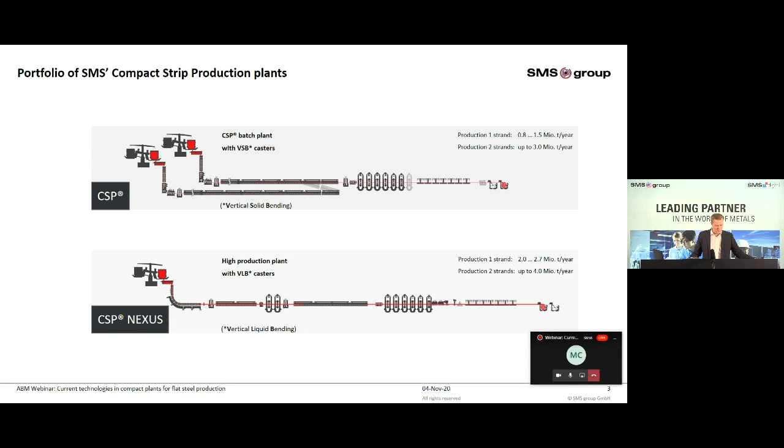With the first CSP plant in 1989, SMS has now more than 30 years of experience in thin slab casting and direct rolling technology. As you can see in the sketch, a typical CSP plant has one or two casting machines, a pendulum shear to cut the strand into slabs, a tunnel furnace to heat and homogenize the slab, acting as a buffer for the compact hot rolling mill. The mill typically has 6 to 7 rolling stands, followed by a laminar cooling table to cool down the strip and adjust the material properties of the product. At the end, the strip is coiled at the downcoilers.

The standard production mode is batch, coil-to-coil production, meaning the slabs are cut after the casting machine to coil weight. With the help of a high-speed shear, a CSP plant can produce in semi-endless mode. A very long slab is produced, rolled, and cut into multiple coils right before the coiler. This mode increases the production stability when rolling thin strips.

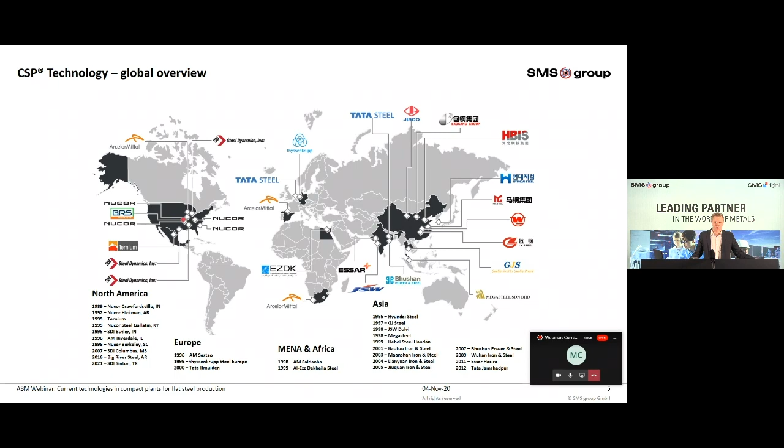Big River Steel is a newcomer in the steel business. The Greenfield project was realized due to several financially strong investors. The steelworks of Big River Steel is arranged, and the installed technology was chosen with the focus on flexible production and efficient operation.

As said, Big River Steel will produce 3 million metric tons per year after commissioning of the second phase, with only 600 employees in total. The hot strip thickness range is 1.5 millimeter up to 25.4 millimeter, and Big River is able to produce strips up to 1930 millimeter width.

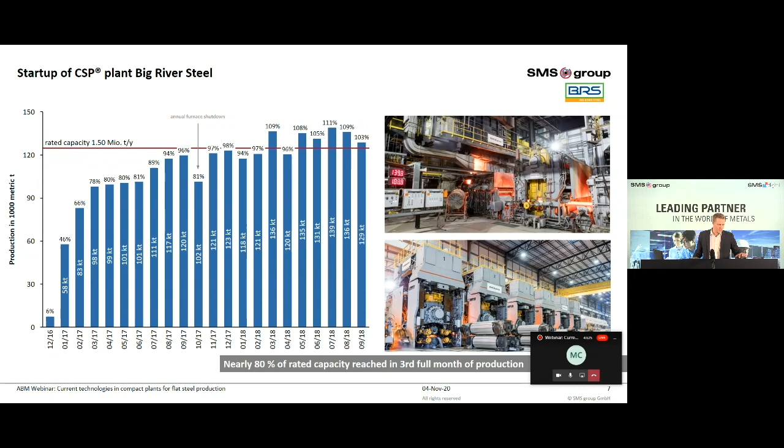The digital future has already begun. Big River Steel is called the Learning Steel Factory. SMS Digital, a subsidiary of SMS Group, is a team of data scientists and digitalization experts with roots in the SMS Group. The combination with SMS Digital's innovative solutions for data infrastructure, digital products, and machine learning resulted in the first learning and self-optimizing steel mill.

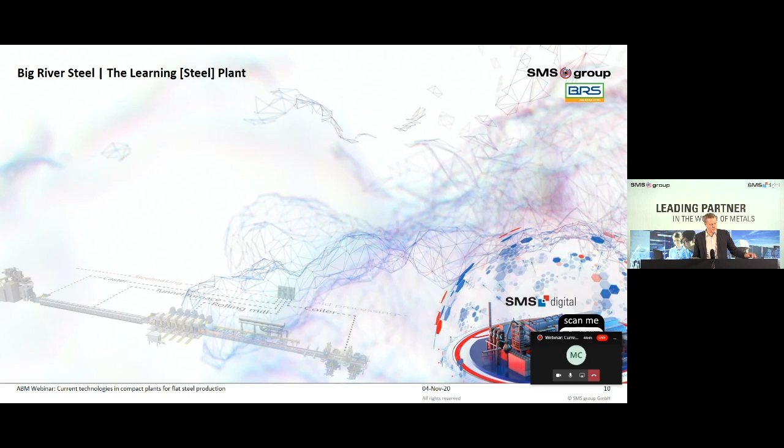2,700 sensors and 15,000 signals are continuously and permanently stored in the SMS data factory. The huge volumes of data are evaluated and used as part of a big data system to improve melting, casting, and rolling strategies.

The learning steel plant auto-adaptively optimizes its production process as part of an integrated value chain based on physical plant elements, data-driven models, and systems with regards to production planning, product quality, and plant condition. The key factor of success is turning data into value.

For more information about the Learning Steel Factory of Big River Steel, you can scan the QR code.

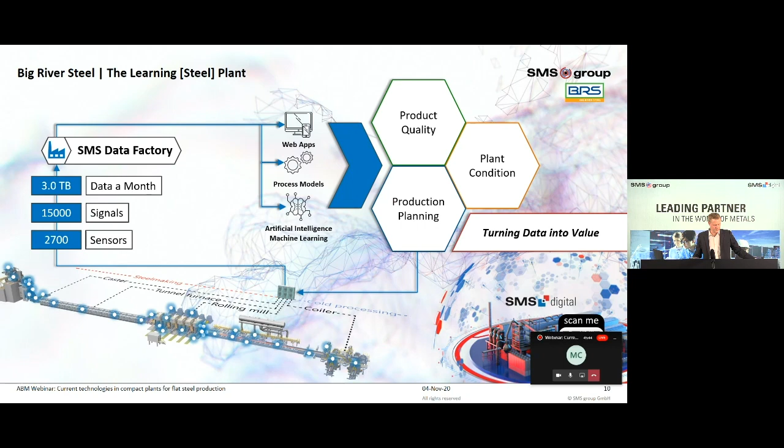From the very beginning in this project, SMS and Big River Steel focused on efficiency, minimized energy consumption, as well as minimized emissions. SMS designed and built the whole plant with the selection of components and technologies to achieve these green requirements. That's why Big River Steel received the LEED certificate for leadership in energy and environmental design, as the first steel plant worldwide.

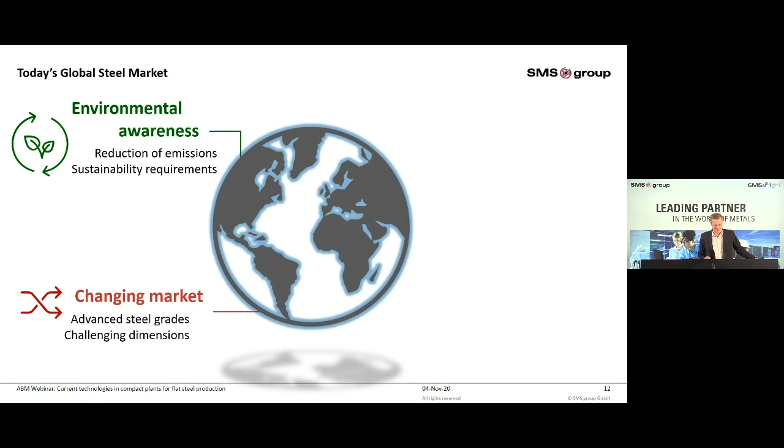Having a look at today's global steel market, the green pressure for environmental awareness is growing. The steel industry has to reduce their emissions and fulfill sustainability requirements in the future. In addition to that, the changing market asks for even more advanced steel grades and challenging dimensions. Combined with the global overcapacities of over 20%, today's market demands are efficiency, flexibility, and promptness to produce steel on a profitable level.

The solution which meets these market demands is CSP Nexus. The layout shows the basic Nexus setup with a casting machine, a tunnel furnace, a two-stand roughing mill, a second furnace, a 6-stand finishing mill, laminar cooling, and 2 downcoilers.

The Nexus plant is capable of producing up to 2.7 million tons per year with 1 strand, and up to 4 million tons per year with 2 strands.

As a 1-strand plant, furnace number 1 has a length of 30 meters, and furnace number 2 has a length of 80 meters. It is possible to produce strips with a thickness of 0.8 millimeters up to 25.4 millimeters, and a width of up to 2,130 millimeters. The Nexus plant can produce in batch, short endless, and endless rolling mode.

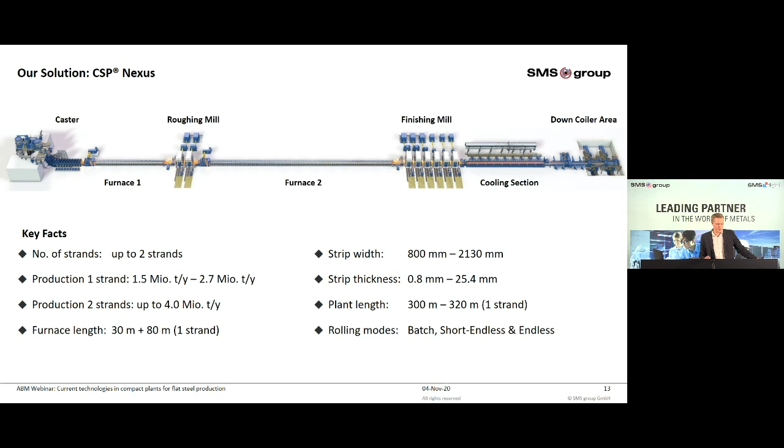Having a look at the product mix portfolio, the CSP plant can produce all typical steel grades, including silicon, multi-phase, advanced high-strength steel for the automotive industry. As you might know, peritectic grades are difficult to produce with a thin slab caster. The combination of high casting speeds and a funnel-shaped mold is not favorable due to phase transformation and the related volume change during solidification of peritectic grades.

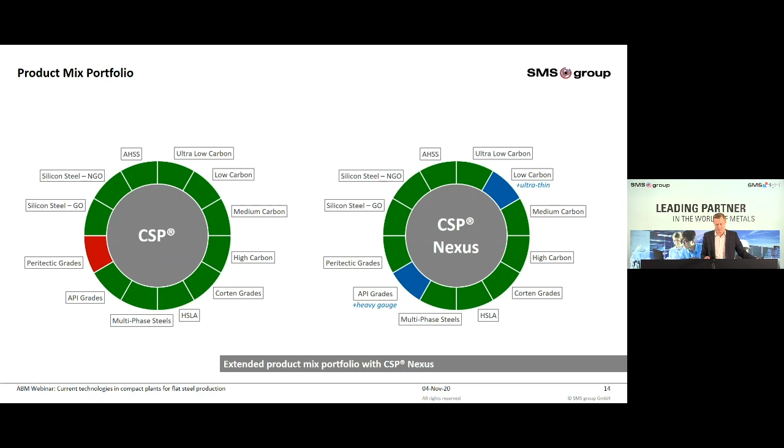The Nexus plant is capable of producing such peritectic grades. In addition to that, it can produce ultra-thin, low-carbon grades, as well as heavy-gauge API grades up to 1 inch.

Now, I would like to fly with you through the Nexus plant, beginning with a high throughput casting machine. The bow-type caster has a length of up to 25 meters, a casting thickness range from 110 to 130 millimeters, a casting speed of more than 6 meters per minute, and a casting width of 2,130 millimeters, which ends up in a high level of steel mass flow.

To ensure a stable production at high steel mass flows, it is mandatory to control the steel mass flow in the mold.

The stabilization of the mold level starts with the machine head design. Therefore, the mold, the oscillator, segment 1, segment 2, and the electromagnetic brake are positioned on the foundation independently to prevent vibrations. To control the steel flow, the selection and interaction of the SEN, the established funnel-shaped mold design, and the electromagnetic brake is very important.

In the design phase, several CFD simulations were done at SMS. The figure at the bottom shows the result of a simulation with and without the EMBR at a high steel mass flow. The crucial factor is the steel velocity at the mold level. A too high velocity will end up in unstable casting conditions due to uneven melting of the casting powder and an inhomogeneous heat transfer in the mold.

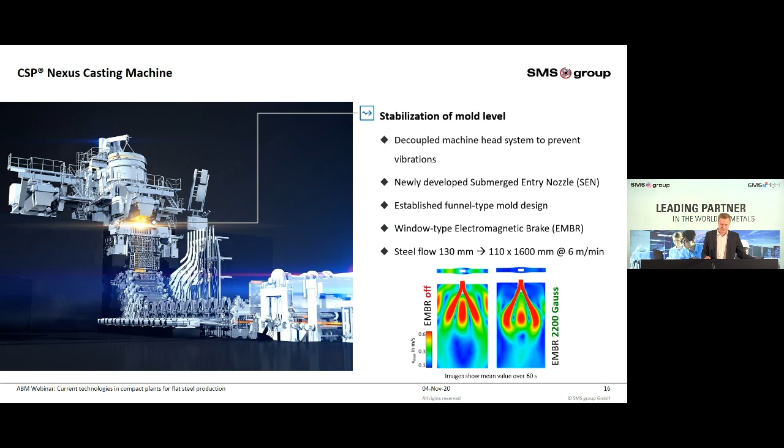At high casting speeds, the strand shell is thin when leaving the mold. To minimize the bulging effect of the strand shell between the rollers, several countermeasures are necessary. The secondary cooling is controlled by a level 2 process model to guarantee a fast strand shell growth without quality issues. The bearing windows between the rollers are small and staggered to minimize strain.

The next slide shows an option to even extend the product range. For some high crack sensitive steel grades, it is required to cast at low casting speeds. Therefore, the machine head can be changed to use a parallel mold for 150 millimeter casting thickness to realize casting speeds below 2 meters per minute. This option enables the Nexus plant to produce steel grades with a carbon content in the peritectic region.

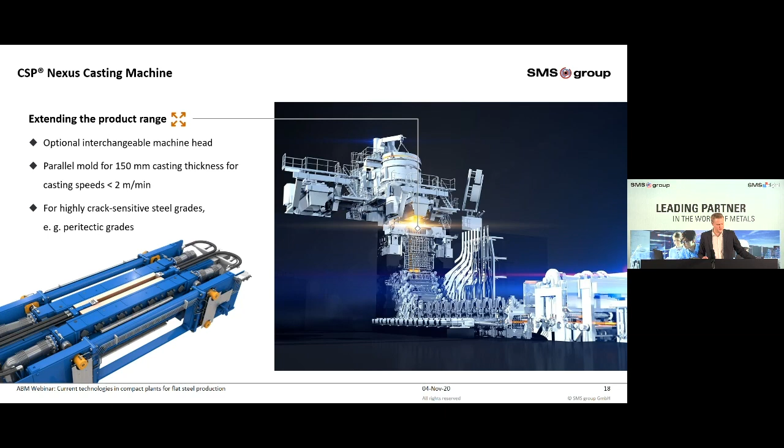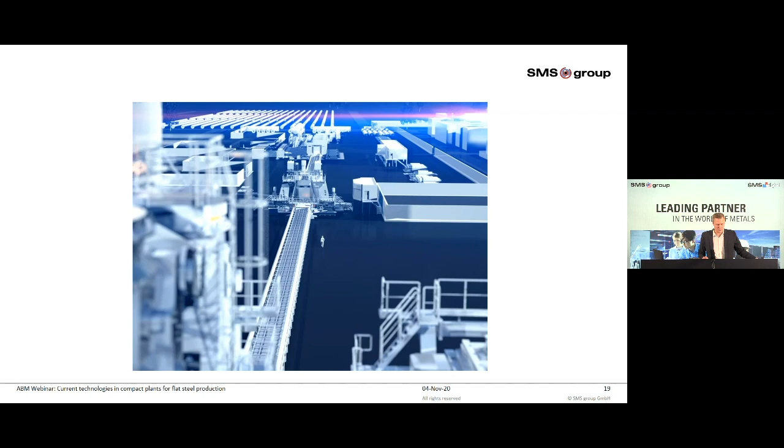Having a look from the caster platform, you can see the first tunnel furnace, the roughing mill, and the second tunnel furnace.

The task of tunnel furnace number 1 is to increase the slab temperature, to equalize the slab temperature for a risk-free production of crack-sensitive grades, to enable the batch process so the slab is cut before beginning the rolling process in the roughing mill, and to enable the work roll change in the finishing mill.

The tasks of tunnel furnace number 2 are to enable the independent operation of roughing mill and finishing mill, to homogenize the temperature of the transfer bar, to raise the temperature of the transfer bar in case of endless production, and to enable the work roll change in the finishing mill without stopping the production sequence.

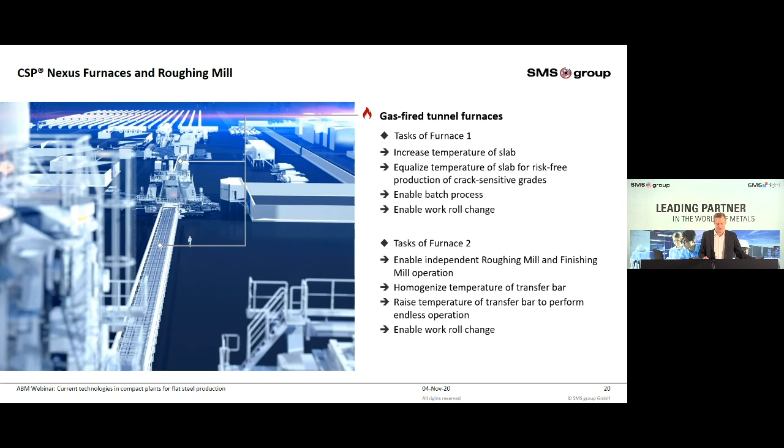The furnaces are designed for minimum energy consumption and emissions. Ultra-low NOx burners are used in the pulsing mode to always run in the most efficient working range. These burners are hydrogen ready and can be operated with gas, a hydrogen mixture, or even 100% hydrogen. The heat of the waste gas is used to preheat the fresh air by recuperators.

Dry rollers with energy savings of up to 85% can be installed in tunnel furnace number 2 because of the lower atmosphere temperature level compared to furnace number 1. Tunnel furnace number 1 can be equipped with fiber insulated rollers with energy savings of up to 30% compared to concrete rollers.

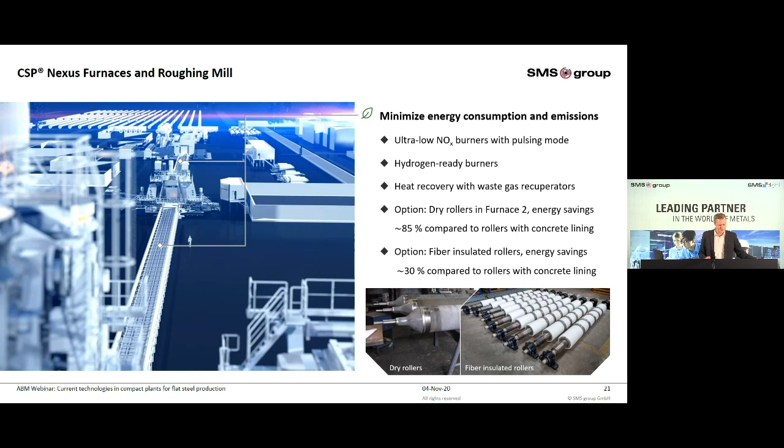The roughing mill of the Nexus plant is capable of reducing the slab thickness to an optimum incoming thickness for the finishing mill. It allows the caster to always cast at optimum casting thickness in terms of productivity and temperature. Productivity can be increased even more by the use of an edger in front of the roughing mill.

The next slide shows the finishing mill with typically 6 mill stands. The advanced guiding system improves the center line positioning and increases rolling stability, especially during thin gauge production. Stable rolling of thin and wide high strength steel grades is supported by a highly dynamic thickness control. The strip temperature is controlled during the rolling process to hit the desired final rolling temperature. An integrated temperature model considers and controls the temperature profile along the entire plant. The well-established CVC Plus system cares for excellent strip profile, contour, and flatness.

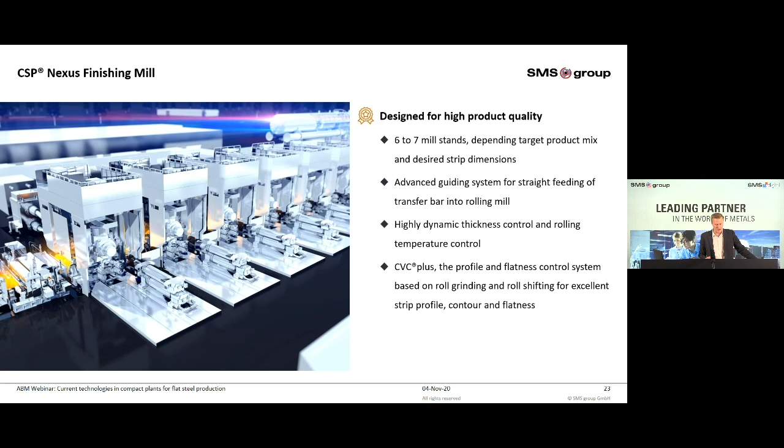An outstanding strip surface quality is guaranteed by rolling gap lubrication, gap conditioning, including anti-peeling and roll gap lubrication. The scale growth is considered along the entire plant. The tunnel furnace atmosphere is adjusted to a favorable level of scale formation. State-of-the-art high-pressure descaling systems are positioned in front of both mill trains.

Alternatively, the Piroscale system can be installed, which is a newly developed rotary descaling system. It reduces the water consumption by 50%, which reduces the temperature losses. The rotary system design leads to a more uniform descaling result.

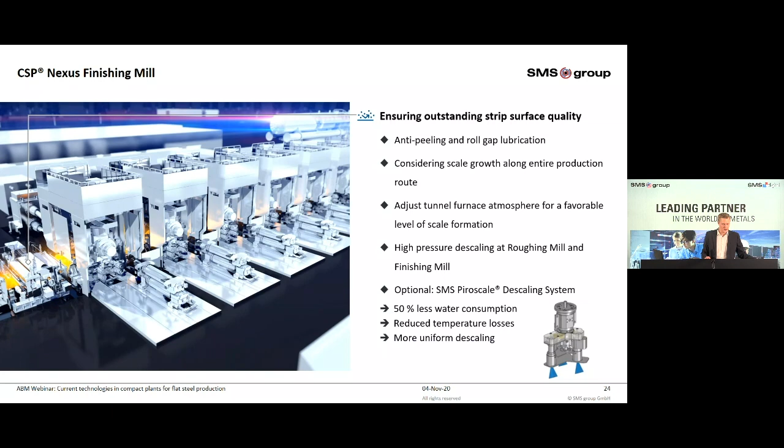Another new development is the convectional roll cooling. As you can see in the left graphic, the work rolls are usually cooled by spray nozzles. The right graphic shows the principle of cooling using the effect of forced convection. With this system, up to 90% energy costs can be saved due to less water consumption and less pump power needed. The picture shows an installation of the convectional roll cooling at a German customer. The system is robust, wear resistant, and self-adjusting, so this system became a standard feature in all future SMS mills.

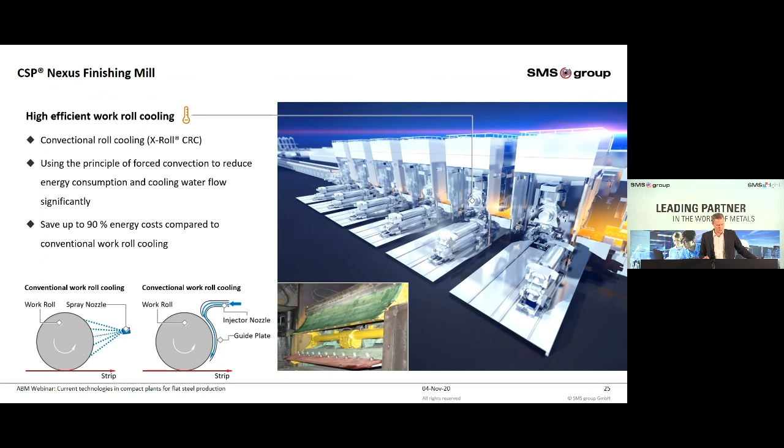The next slide shows the laminar cooling line of the Nexus plant. The latest strip cooling technology is installed and allows a wide range of settable cooling rates. High cooling rates improve the strength and the toughness. Higher strength allows a reduction in alloying costs. Low cooling rates are needed for soft grades with higher formability, for example deep drawing and extra deep drawing grades. The cooling rates are controlled by a process model to achieve the desired material properties.

Even more beneficial is the direct compact cooling. As shown in the picture, the system is positioned directly after the last mill stand. This leads to even higher improvements in strength and toughness, and as a result, higher savings of alloying costs. Another benefit is a lighter chemistry in the casting and rolling process, because the strength is set at the laminar cooling and not only by the alloying elements.

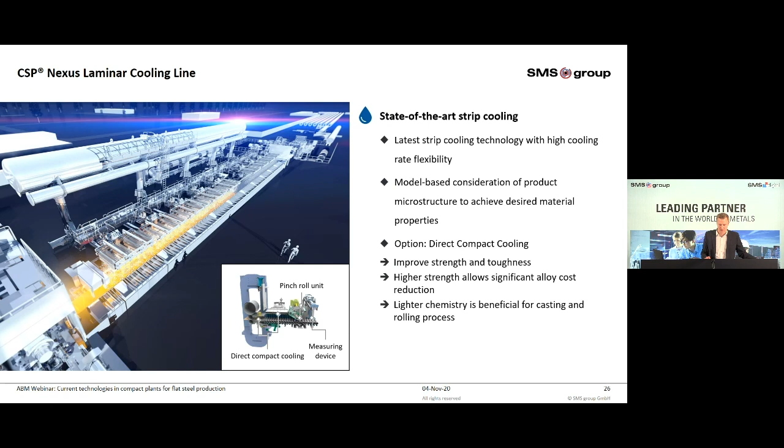This slide describes the 3 different operation modes of the Nexus plant. In batch mode, the slab is cut directly after the casting machine. This is best practice for thermal progression and energy savings.

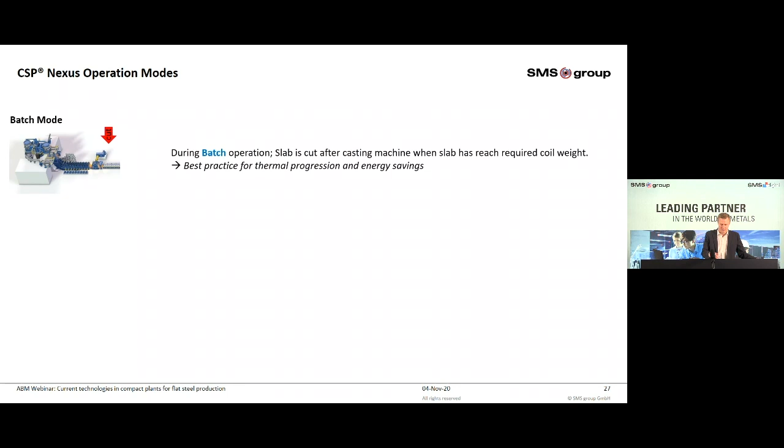In short endless mode, the cut is made behind the roughing mill, so caster and roughing mill are working in endless. The benefit is that there's no head-tail flare and therefore no head-tail losses on each slab. This will increase the yield of the plant.

In endless operation, the strip is cut right before the downcoiler with a high-speed shear. The entire plant will work in endless operation. This will increase rolling stability of ultra-thin, low-carbon grades. The Nexus plant can produce low-carbon grades in endless without an additional induction heating, which lowers the overall OPEX.

As you can see, 3 modes are possible with the CSP Nexus plant. Each mode has some pros and some cons. At the end, the operator can choose the most beneficial mode for each product.

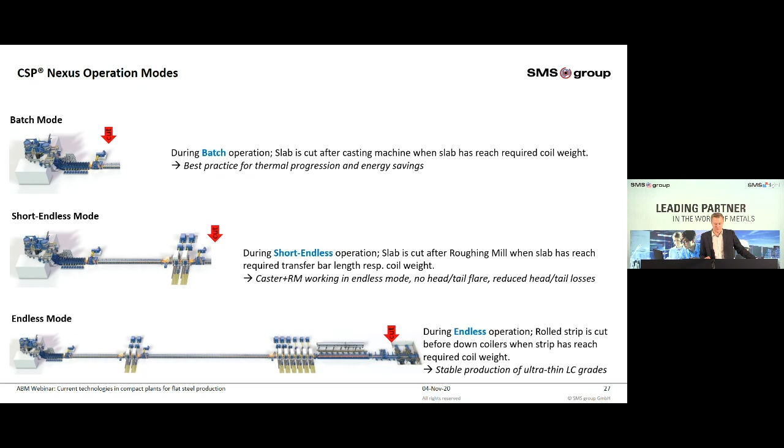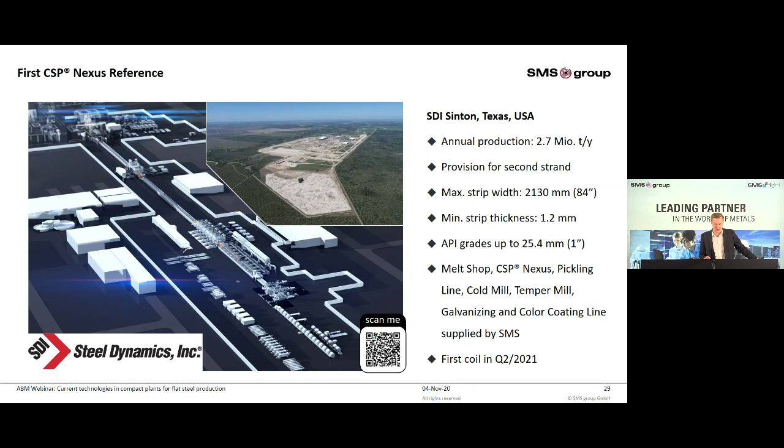The last slide of my presentation shows the first CSP Nexus reference we are currently building for SDI in Sinton, Texas, in the USA. The annual production will be 2.7 million tons per year. There's a provision for a second strand to increase the production up to 4 million tons per year. The maximum strip width is 2,130 millimeters, which will be our widest CSP reference.

Can you see my screen? Still, yes. Excuse me, okay.

The strip thickness range is 1.2 millimeters up to 1 inch for API grades. The whole facility, including melt shop, CSP Nexus, pickling line, cold mill, temper mill, galvanizing line, and color coating line, is supplied by SMS. The first coil will be rolled in the second quarter of 2021. If you want more information about the SDI Sinton project, just scan the QR code.

At the very end, I would like to come back to the record-breaking startup curve of Big River Steel. With SDI Sinton, we want, and we will, beat the startup curve of Big River Steel to set another record in starting up a plant.

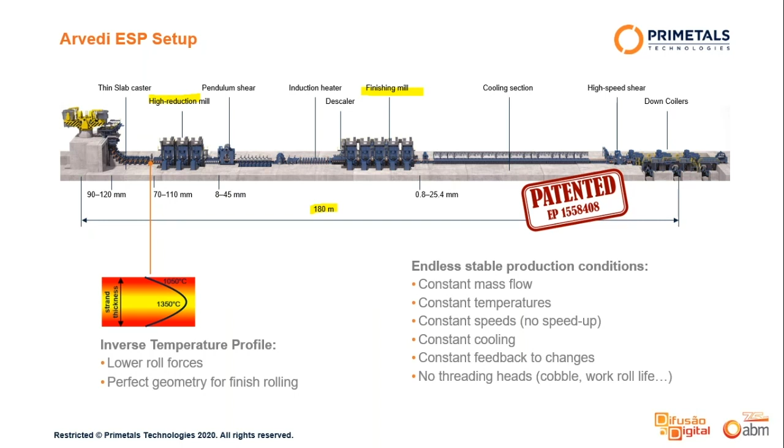The product portfolio comprises everything you can imagine, starting from mild steels over ultra-low carbons, microalloyed steels, multi-phase steels, as well as pipe grades. Arvedi ESP has got an API X70 certificate. Steel for pressure vessels and gas bottles, as well as boron steel and high carbons, round up the portfolio.

Further to say is that here we have the tested grades, and for further development, advanced high-strength steels and silicon steels have been tested and are on their way for further development and implementation. Even a DP1200 has been tested. With regards to peritectic steels, this cannot be made with a funnel mold, but if this would be required, a thicker parallel mold would be implemented to also achieve peritectic steel grades.

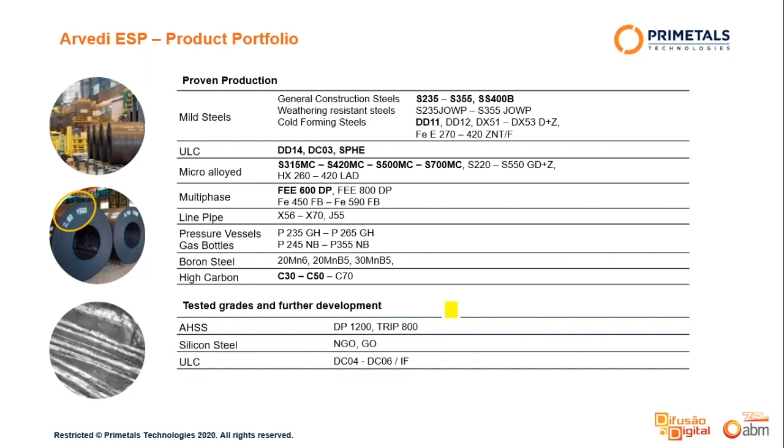We have here an overview of the implementations of ESP lines. The Arvedi ESP line can flexibly be implemented according to production route requirements and desired end products. The Arvedi ESP line in Cremona was actually the first one installed in 2009 with an original capacity of 2 million tons. Now in 2020 it was upgraded to a capacity of 2.8 million tons. This was possible as the plant was set up already earlier for such an outlook, giving the possibility for later upgrades.

Rizhao Steel followed after this first line Arvedi ESP with the order of 5 lines. Rizhao Steel is running a completely different approach, and both companies, both approaches, will be explained on the next slides.

Interesting to be mentioned are the projects with US Steel, who use Arvedi ESP to better realize their own developed XG3 advanced high-strength steels. The stable endless operation is advantageous for production of this steel. Also the ESP line, especially for thick API grades, shall be mentioned.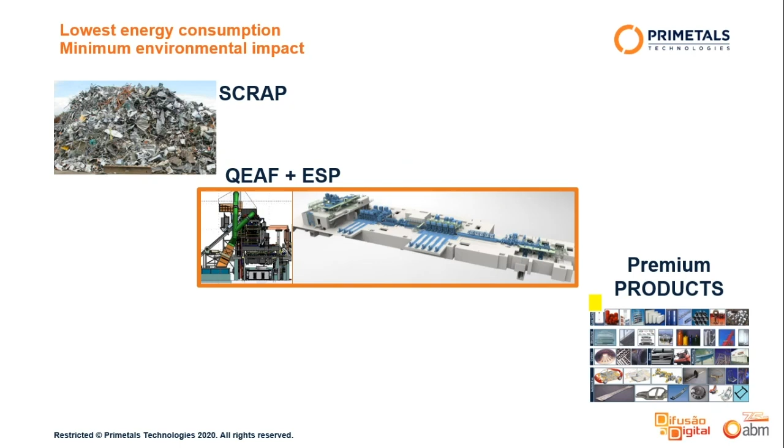In this context, it's also important to mention the possibility of coupling a Quantum EAF with an ESP line to a Minimal Flat for production of premium products from scrap. In this combination, the Minimal Flat melts the scrap on less than 280 kilowatt hours per ton in a Quantum furnace and rolls it to high quality on less than 132 kilowatt hours per ton in the ESP line. This means beside lowest energy consumption, also lowest emissions and other consumptions at highest yield.

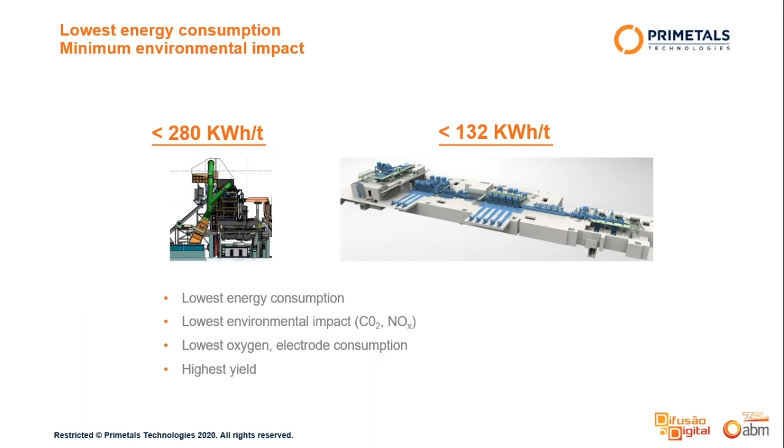Arvedi ESP has been green certified according to Path 2050 standards by TÜV Germany. Compared to conventional casting and rolling lines, ESP produces 39% less CO2 and 88% less NOx. The biggest benefit is that Arvedi ESP completely omits a gas-fired tunnel furnace, so there are no direct emissions. And due to its compact layout of just 180 meter length, no energy is lost during the whole production process.

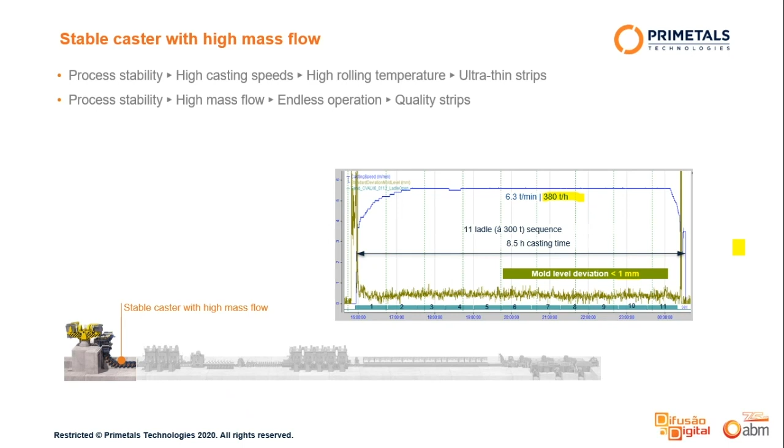Coming now to the operation. The biggest plus of the Arvedi ESP line is its stable operation. It starts already at the caster, even at highest mass flow of 380 tons per hour, as you can see here. Performed for 8-hour sequences with more than 3,000 tons, the mold level deviation is below 1 millimeter. This gives perfect stability, and this high mass flow is the basis for high rolling temperatures, endless operation, and thus quality strips.

After the caster follows directly the high reduction mill. Rolling a hotter and thus softer core requires of course less energy and leads to better shaping of crown and wedge for finishing rolling.

The pusher-piler area is the flexibility and safety zone of the ESP line. It allows dummy bar evacuation and feeding and plate production during downstream issues. There is absolutely no need for a tunnel furnace, which would be just limited in storage capacity. Plate production can flexibly react to any production requirements.

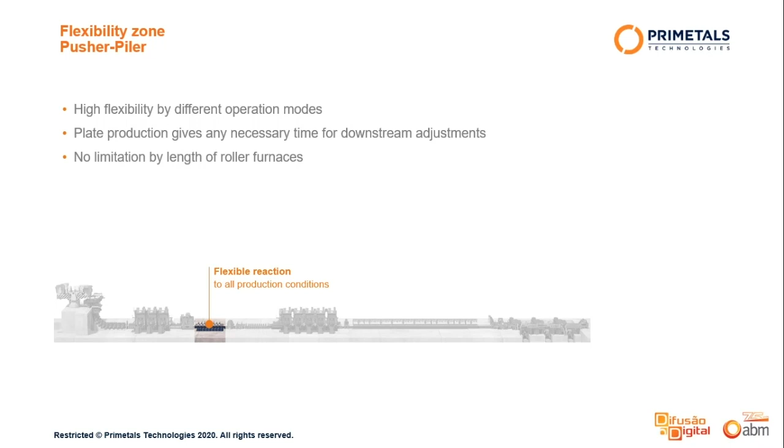Optimized heating is possible with the 10-meter short induction furnace. Short heating at high strip speed means reduced scale loss, and this means increased yield compared to tunnel furnaces. Additionally, such a short furnace requires drastically reduced maintenance efforts. During any operational break, the power can be completely switched off. Finally, important is the fact that the induction heater is built up of 10 modules, which allow optimized control of the temperature with immediate feedback.

Due to the perfect shaping of the intermediate strip in the high reduction mill, the finishing mill can be run with conventional work roll contours, what allows then wear compensation. This leads to double work roll life campaigns compared to coil, or call it batch processes or batch operations. This is an essential operational cost factor.

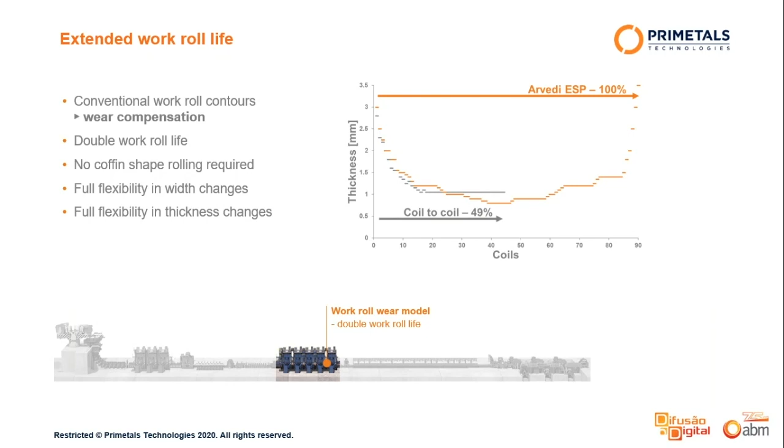So ESP does not require coffin shape rolling and is fully flexible in width change decisions, as well as in thickness decisions. Someone could now mean that the coil-to-coil mode supported by tunnel furnace would be helpful or essential, but this is not the case, as we can see here on the example of the inline work roll change.

The inline work roll change allows to open the work rolls during rolling and to execute the roll change like well known from cold rolling. During the operation, the final thickness is increased as the changing stand is dummied. After roll exchange, the plant goes back to desired minimum thickness and the sequence length is doubled.

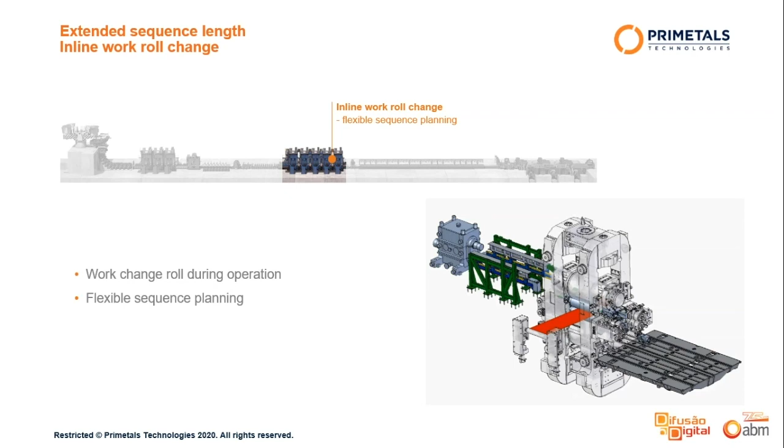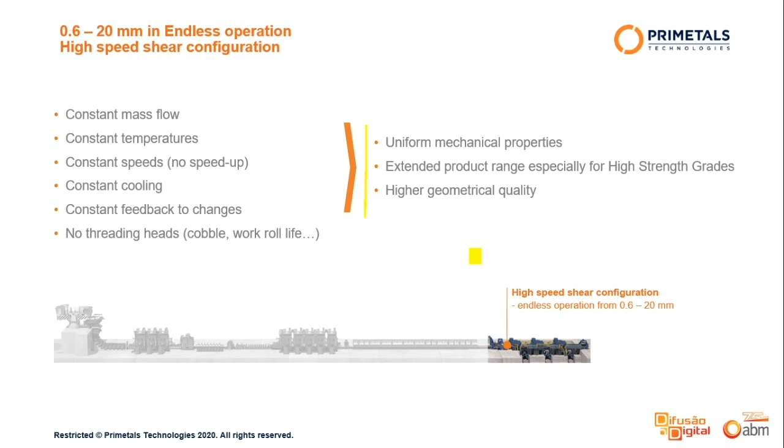Here we are now at the high-speed shear. This configuration allows cutting from 0.6 to 20 millimeters, always in endless mode. The benefits of endless are the constant mass flow, temperatures, speeds. We do not have any speed ups, constant cooling, feedback to changes, and no threading heads. And this leads to the essential benefits for rolling: uniform mechanical properties, extended product range, especially for high strength grades, and higher geometrical quality.

So the process is completely predictable. The shape of the rolled strip can be flexibly adjusted as desired. Very beneficial is adjusting a flat crown within the cold strip standard. This allows slitting and increases productivity when producing on full widths. As the strip is completely flat, further cold rolling and processing can be perfectly performed.

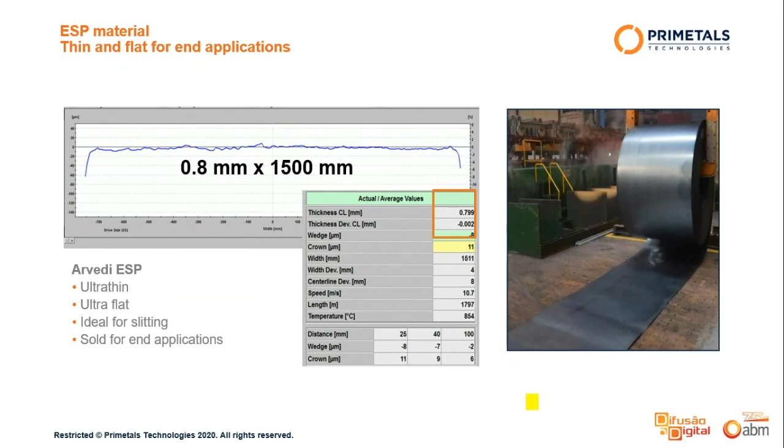Most appreciated from processors is the fact that ESP material shows uniform mechanical properties from head to tail. There is no difference in yield strength, tensile strength, elongation or grain size. Of course, the plant never sees a head or a tail, and the strip is never influenced by speed ups or other operational requirements as known from coil-to-coil rolling.

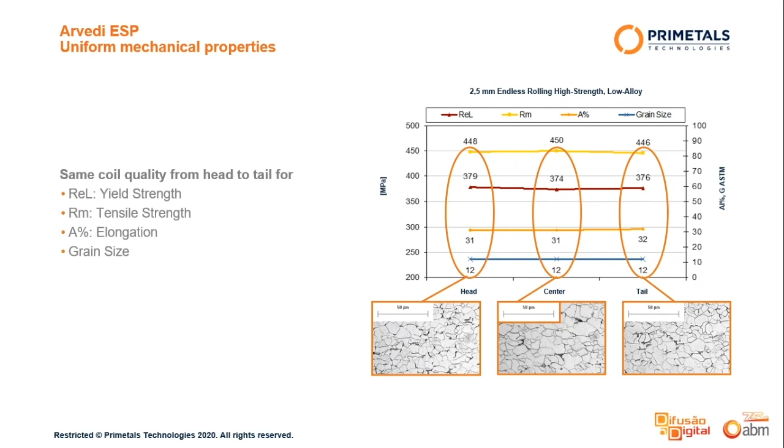At the end, we have then coils with perfect strip quality. Coils do not only fulfill the requirements for hot rolling standards, but also the narrow standards of cold rolling, and even automotive requirements. All that just with hot rolling and without involvement of any cold rolling plant.

During operation, widths, thickness and grades can be flexibly adjusted. Flying gauge changes are a standard procedure at ESP lines. Grade changes are calculated in the caster with the mixer expert, and with the digital twin function of this tool, such changes can be even tested in advance in the office before execution.

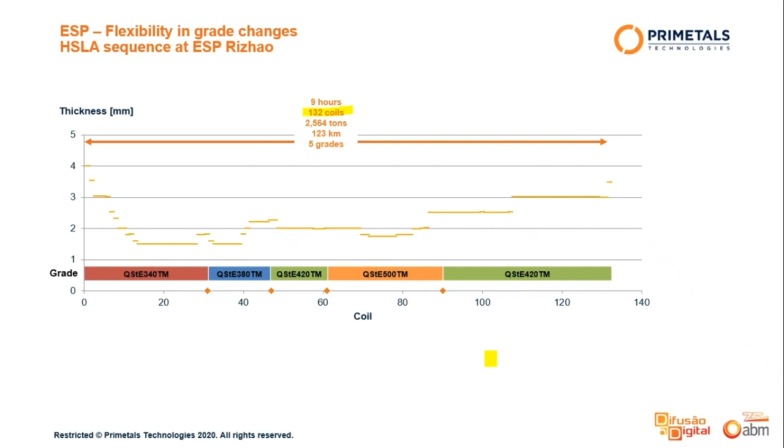We see here a sequence which produced 132 coils in 9 hours, more than 2,500 tons. And in total, we had 5 grades produced in this sequence.

Low operational costs are always essential for successful plant operation. Here we find a summary of some factors. We mentioned already the low energy consumption due to the compact layout and the lower scale losses. The operating plants show both caster breakouts and breakout rates and cobble rates below 0.1%. And due to the thermomechanical rolling on stable speed, over-alloying can be drastically reduced for HSLA and API grades, as staying above the non-recrystallization temperature is assured. And finally, the much higher work roll life, which we have seen already before.

On the sales side, beneficial is omitting the head and tail cuts. Customers appreciate uniform strip quality and are willing to pay much more for endless coils compared to coils produced in coil-to-coil mode. Even more is paid for ultra-thin gauges, which are sold at prices just below the cold roll price. Just today, we learned from one of our customers that they can sell the coils from the ESP line at double profit compared to their also existing hot strip mill, which is operated, of course, in batch mode. So this endless benefit is really appreciated by end customers, and they are willing to pay for it.

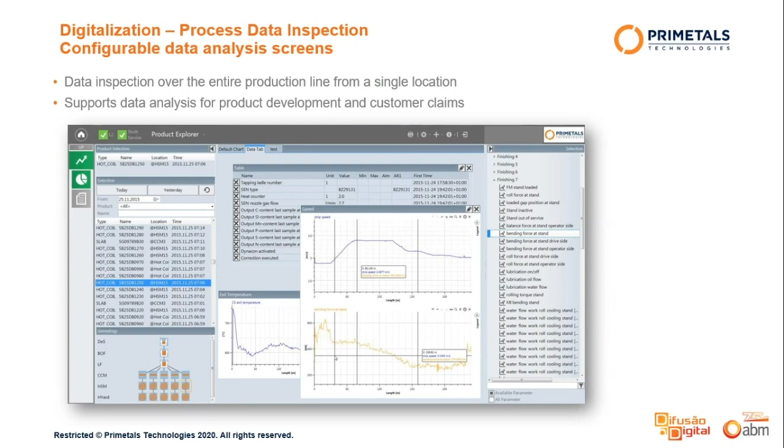All that results in the products directly made from ESP lines. Examples are boilers, heaters, tubes, galvanized material, structural and high carbon applications, containers, and many automotive applications.

What I gave here was an overview of the ESP technology. If you want a deep insight, on 10th of December there will be a live webinar where you can register under meta.ls/ESP2020.

As a conclusion, we can say that ESP can be defined by 3 columns. Lowest investment, because we have a very compact layout, minimum foundation, less piping, cabling, roofing, cladding. Lowest operation costs, as alloying is less, we have very high yield, no heating in idle times, low energy consumption. This is compared...

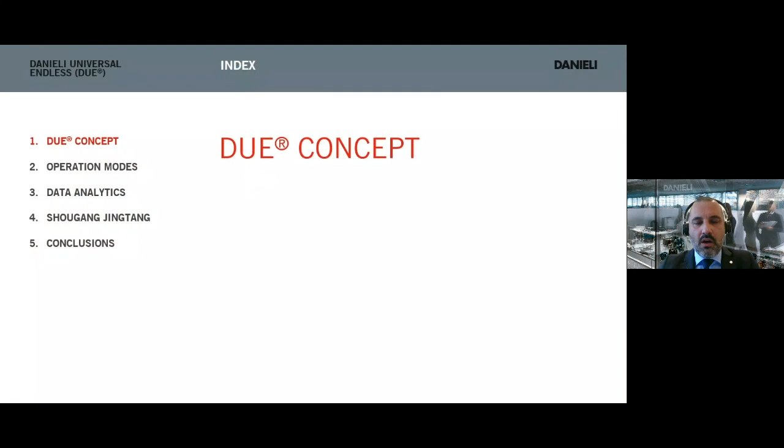This concept has been developed taking into account the market requirements and, of course, customer requirements which it has to accomplish. So looking for a modern plant, possibly on a single strand basis in order to optimize manpower and productivity, which is increased up to 3 million tons per year of hot rolled coils in a single strand caster.

By applying production in a flexible way, it means within the same plant, we must be able to cover commodity grades in order to produce ultra thin gauges, but also value-added grades like advanced high-strength steel, or thick products like API grades for oil and gas application for pipeline environment.

All in all, with the green approach, it means always looking forward for an optimized OPEX, or for minimum transformation costs, as well as for energy saving, which is becoming more and more important nowadays compared to the past. It goes without saying that final products must be of high quality and high tolerances for high demanding applications, in order to get a proper tool to fight on this market, which, although the fluctuations made through the present status of worldwide conditions, there is also a lot of competition in terms of gaining. So this is important, of course, to keep the final quality of the products at the utmost level.

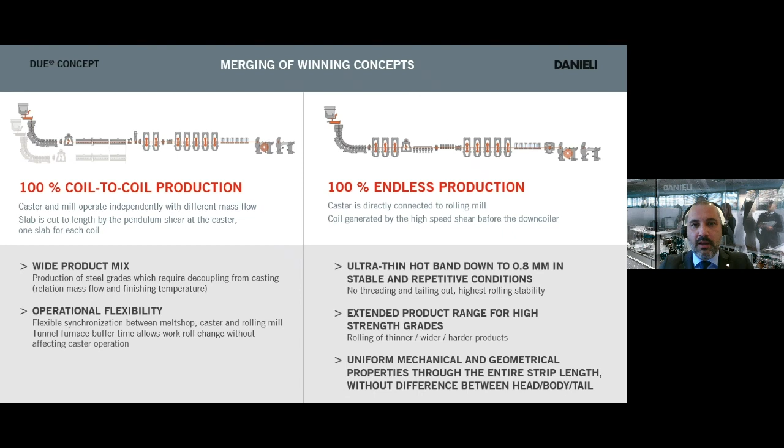By merging these existing technologies, we've been able to incorporate the advantages into a single production line, getting benefit in overcoming some of the limitations that each single plant unit has with either coil-to-coil or endless. So we've unified in a single production line all the winning features of coil-to-coil and endless, and that's become the Danieli Universal Endless configuration, made up of a caster of vertical curved design with

130 millimeter slab thickness at mold exit, soft reduced down to 110 millimeter as final slab, followed by pendulum shear, a short tunnel furnace of about 80 meters length connecting to the mill area, which is made up of 8 rolling stands separated between high reduction and finishing stands by a transfer bar area with crop shear, induction heating system, and intensive cooling system, followed by laminar cooling, high-speed shear, and coiler area.

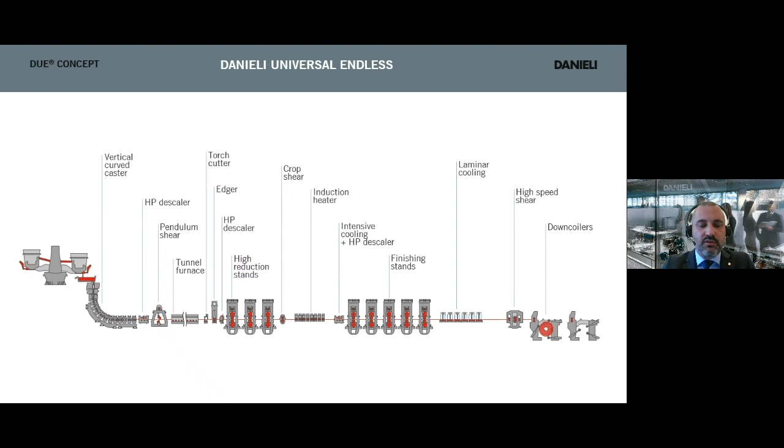It's important to underline that through the line there are 3 high-pressure descalers installed: at caster exit, at the entry side of the high reduction stand, and the last at the entry side of the finishing stand, in order to always grant utmost surface quality on the final product.

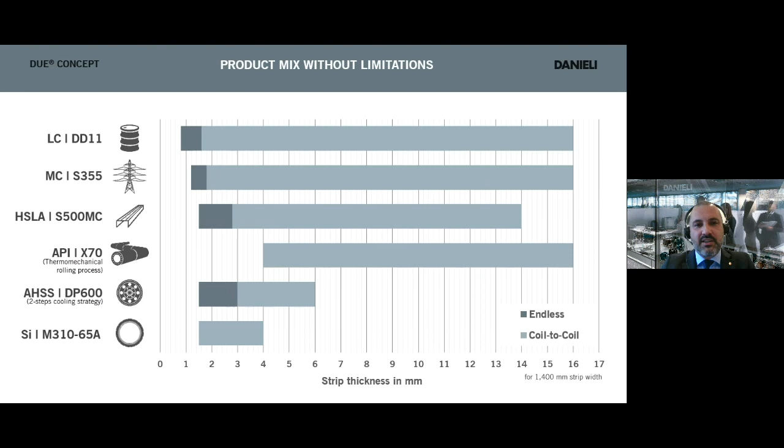By applying this merging of coil-to-coil and endless, we've been able to cover, in this example of possible mix, the lower band of products made in endless, while the thicker band is made in coil-to-coil, selecting the most economically convenient rolling process mode. Endless is a fantastic tool to play with, but cannot be applied for the entire product range of a diversified mix - this goes both in terms of grades and in terms of thickness within a single steel grade.

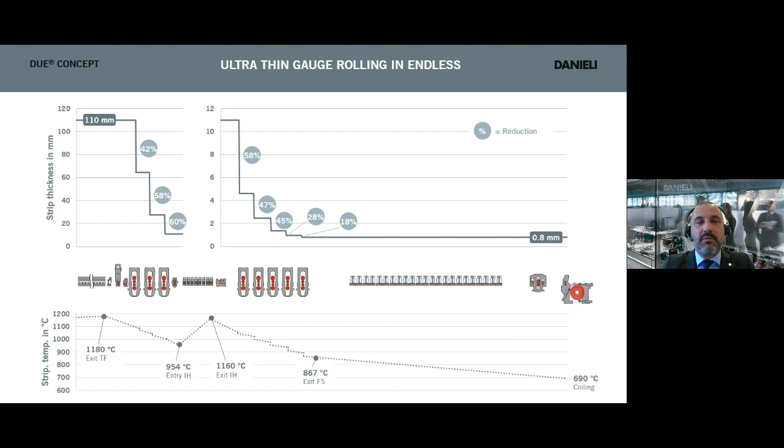With the Danieli Universal Endless, here's a schematic view of the possible reductions on the rolling mill stands, starting from 110 millimeter slab, going down to 0.8 millimeters on the final strip. In the bottom part, you see the temperature pattern along the line, which calls for intermediate reheating, made through the induction heating system.

But to highlight the flexibility of the plant, on the same line, pipeline grades for thicker products can also be made, starting from a coarse irregular grain size of the as-cast microstructure. We get optimization through the high reduction stands before reducing the temperature thanks to the intensive cooling system at the finishing mill entry side, bringing the temperature below the no-recrystallization temperature, and generating a pancaking effect into the finishing mill that, coupled with the proper cooling strategy at the runout table, allows accurate temperature control and real thermomechanical rolling

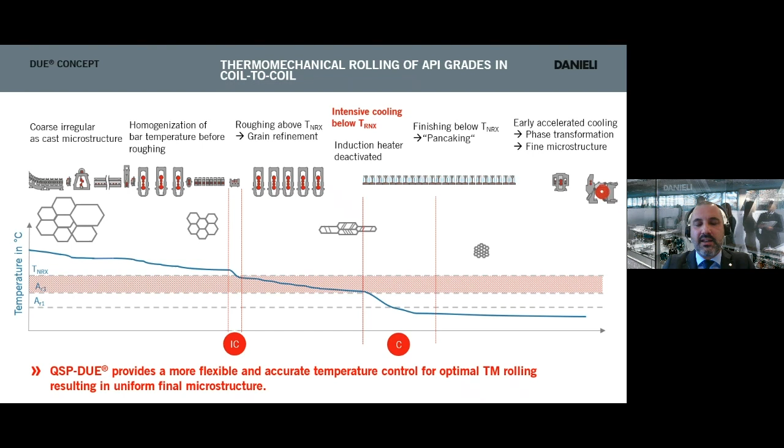also into a thin slab casting and rolling plant, on which Danieli has been pioneering, making API grades for over 10 years now.

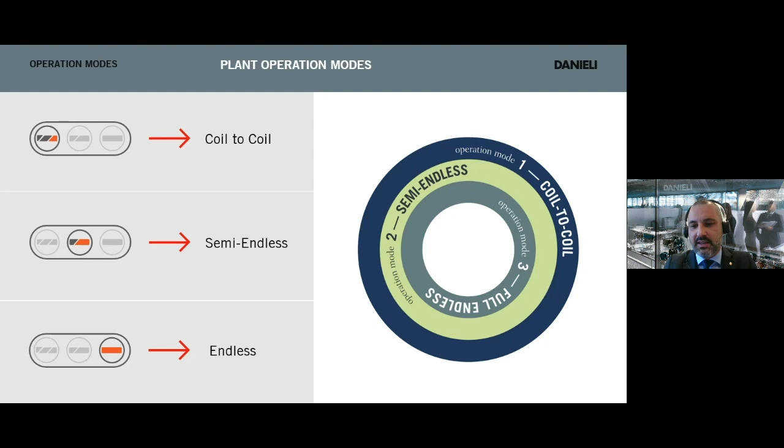A very important issue is the operation modes. We already mentioned coil-to-coil, semi-endless, and endless mode. I'll take the chance to show some animation for whoever is not very familiar with these.

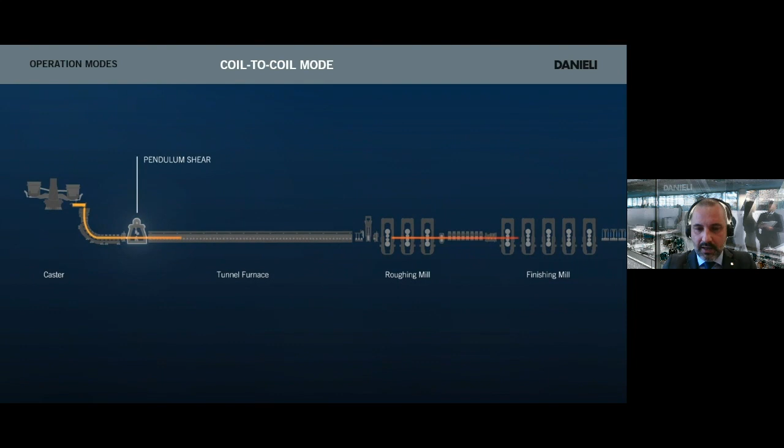So, coil-to-coil, as we mentioned: the slabs are cut in line by the pendulum shear at caster exit, and each single slab is rolled into the rolling mill in order to generate afterwards a coil. So from one slab we get one coil.

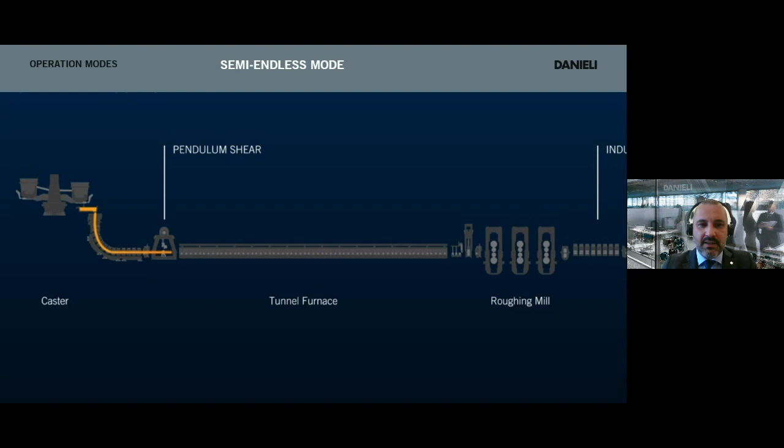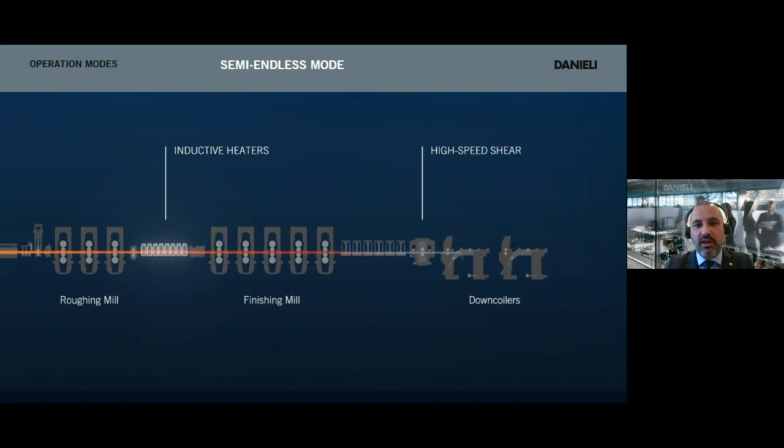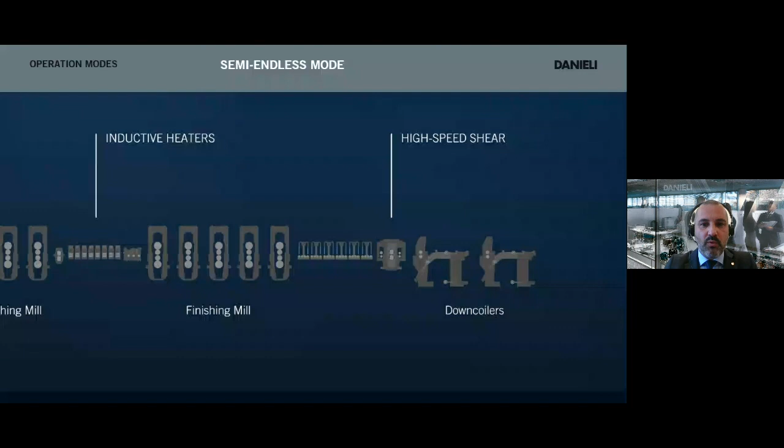The second rolling mode is the semi-endless. It consists of making a longer slab, the length of which is based on the furnace length itself. This mother slab is rolled into one piece, with or without application of induction heater, through the rolling mill, and the coils are cut to length by the high-speed shear at the down coiler entry side. By applying semi-endless, we can also apply flying gauge change in order to reach thinner products than what you can get in coil-to-coil mode.

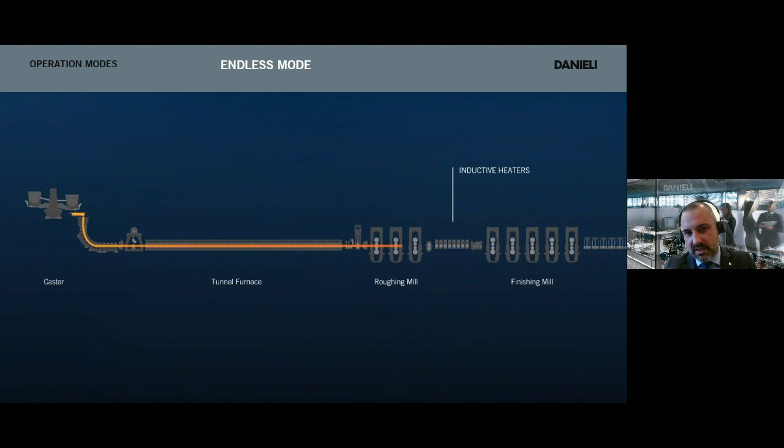And finally, the pure endless mode, which is now becoming more and more familiar to everybody. In this case, there is an uninterrupted slab from caster down to the coiler, with an intermediate reheating in the rolling area thanks to the induction heating system. The slab and coils are cut to length with the high-speed shear. In this case, we can perform thin and ultra-thin gauge production.

So we got all three rolling modes applicable in the Danieli Universal Endless, and the selection is easy for the operator according to the actual steel grade, since not all grades can be produced for metallurgical reasons in endless mode at a reasonably high casting speed. In this case, coil-to-coil is mandatory. The other aspect is the final strip thickness, because for thicker products, endless is no longer economically convenient. So in order to get the optimal OPEX on a case-by-case basis, coil-to-coil is applied, for instance, for the thermomechanical rolled product, as mentioned earlier.

On applying endless rolling, one of the most important pieces of equipment becomes the induction heating system, which, as of Danieli, is fully developed, designed and manufactured in-house. We are applying the latest technology of transversal flux induction heaters.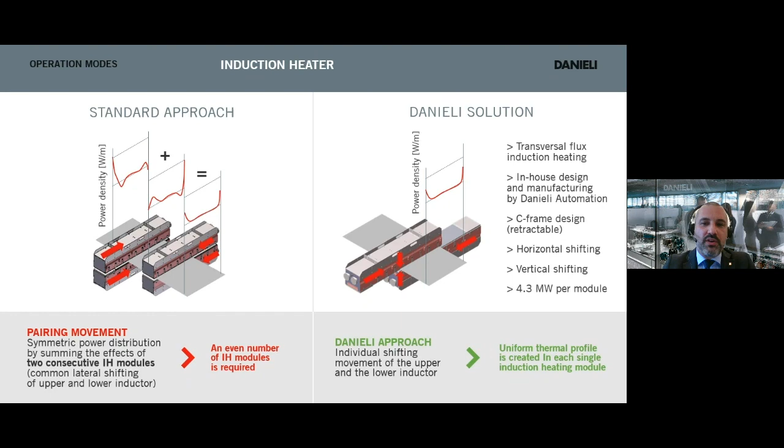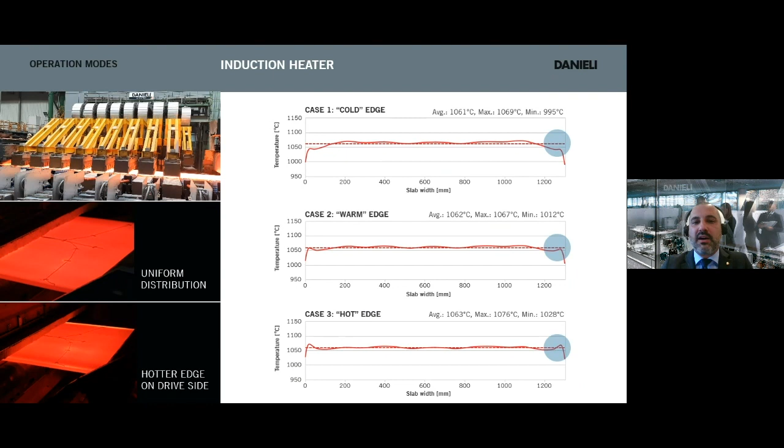The new generation allows both vertical and horizontal shifting, where horizontal shifting is utilized to optimize the temperature along the width. So we can select to get cold edge, warm edge, or hot edge according to the case. And the vertical shifting of each single module is made in order to grant, according to changes in the transfer bar thickness, always the maximum efficiency of the flux transfer.

As of today, automation is now becoming the master. At Danieli, we are providing an integrated system from caster down to coiler, and even the upstream as soon as needed. As mentioned in a previous presentation, we are now in Industry 4.0, with a lot of sensors and devices installed through the line.

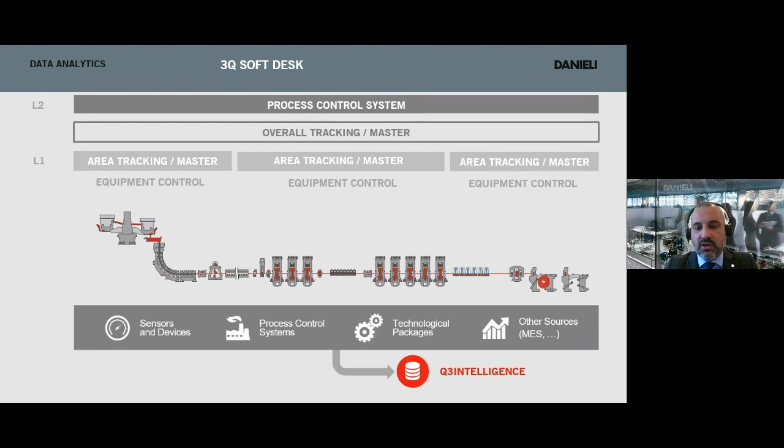So there is a lot of data available, and all that data is saved into a common repository, the Q3 Intelligence, which allows reporting on the ongoing status of the plant, as well as offline analysis and statistical methods to find correlations to optimize the process, and also to develop new grades or new process solutions.

This is also part of Industry 4.0: the visualization of the PPI, the plant performance indicators, which are shown on dedicated screens on the operator pulpits of the caster and mill, and which are accessible even remotely by the plant managers.

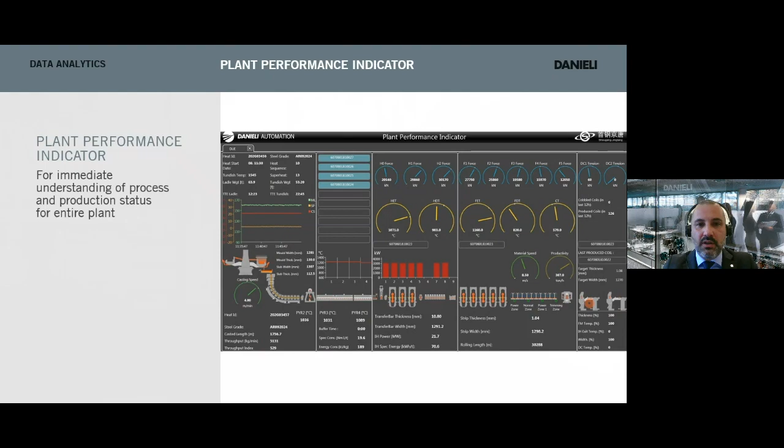So in a single shot, you can get all the main data of the ongoing production. This is a very nice tool to quickly get into the picture, even remotely. This is, of course, coupled with a modern layout on the control pulpit, both for caster and mill, where you can see full visibility on the plant and easy access to the operators' systems.

The Danieli Universal Endless plant is a running plant. For over a year now, the Shougang Jingtang plant in China has been under production. Other references are ongoing or in the engineering stage. But I want to take the chance to share some of the achievements at Shougang, which has a nominal production of 2.1 million tons, with a width range from 900 to 1600 millimeters, and a thickness range from 0.8 up to 12.7 millimeters.

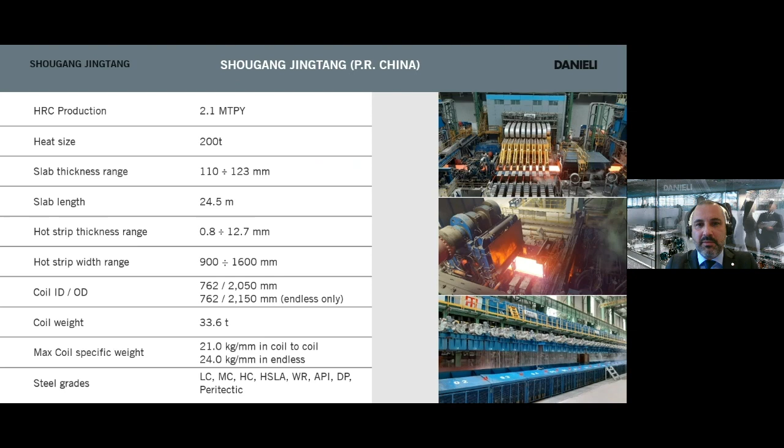Startup of the plant has been made in coil to coil. As soon as we got a consolidation of coil to coil, we moved up to the development of semi-endless rolling, and finally endless rolling has been implemented, getting the first coil after about 45,000 tons from hot roll coil hot test commencement.

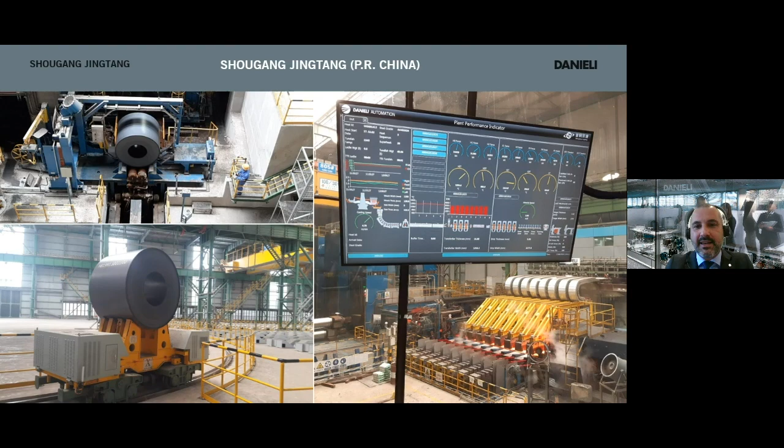This has been very helpful for Shougang, because by making this trial, this step-by-step implementation, we've been able to follow the Shougang order book, since even today Shougang is not producing on stock, but only based on actual orders, either for their downstream facilities or for market. So production is order-based, and with the Danieli Universal Endless plant we've been able to increase the plant commissioning and the order together, in parallel, with joint efforts.

What I was mentioning earlier was the ability of the Danieli Universal Endless plant to produce in coil to coil, semi-endless and endless mode. Now you can see a share of what is being made on those three rolling modes. Thin and ultra-thin gauges are mainly produced in full endless mode, while the thicker part of the mix is produced in coil to coil mode, with some transition made in semi-endless mode.

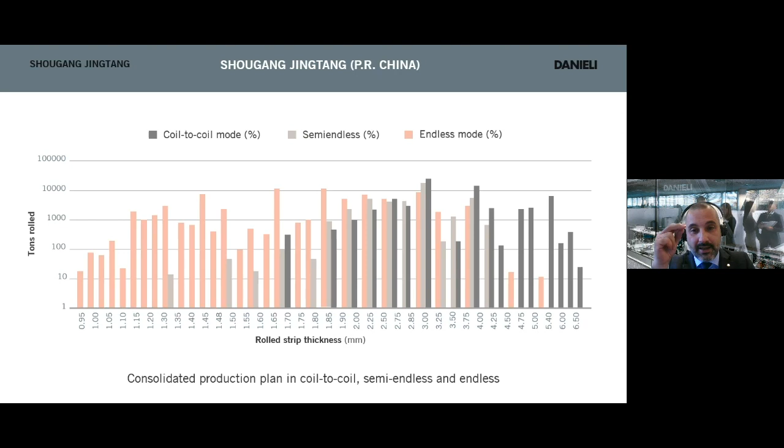It should be mentioned that this is easily made by the operator, who can select the best process suited for the ongoing production, grade and format, in a very easy and flexible way.

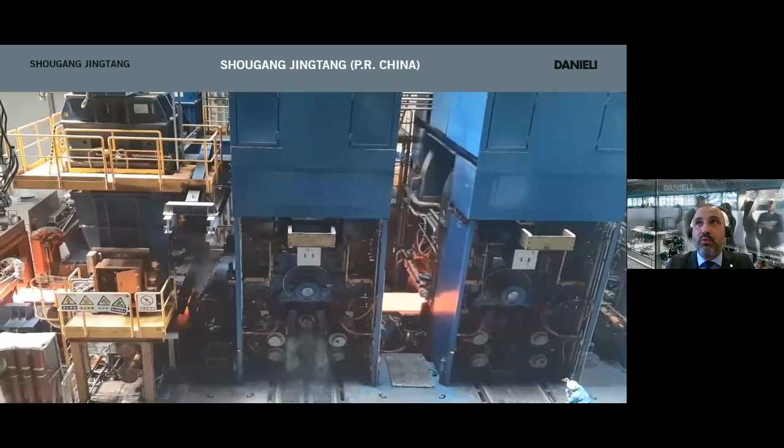Now, by sharing with you - hoping the connection is good enough - just to give you a highlight of the Shougang Jingtang plant, I'll share some additional data. The caster is constantly producing at a slab thickness of 130 millimeters at mold exit, after soft reduction reduced down to 110 millimeters in nominal condition, although trials have also been successfully made using 123 millimeter slab thickness.

The caster so far reached a very interesting figure of throughput up to 6.4 tons a minute, which is very interesting, although we are confident to further increase it in order to exploit the potential of the machine itself.

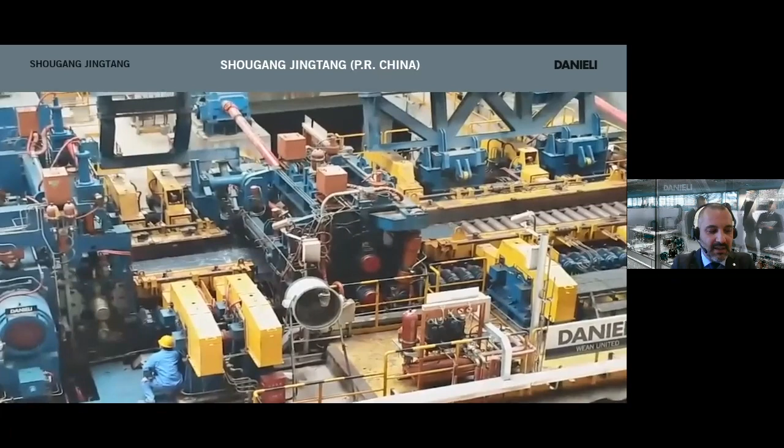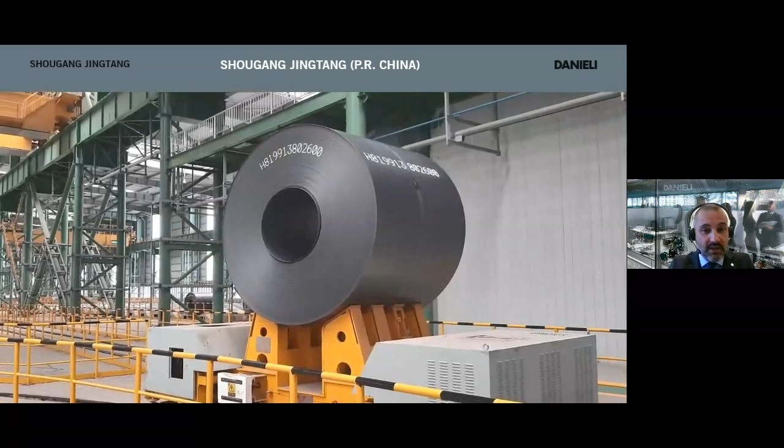So far, the sequence length reached 18 heats per sequence, about 200 tons each, meaning 3,600 tons within the same sequence, or 33 heats within a 24-hour period. So it's a very nice tool.

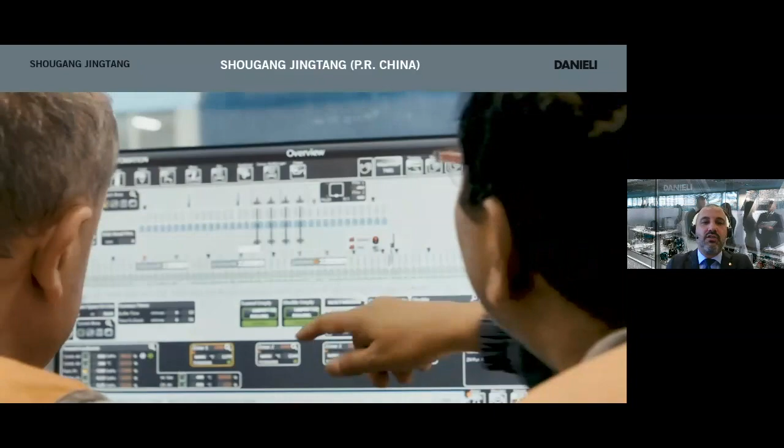By exploiting the flexibility of the Danieli Universal Endless plant, as mentioned earlier, there is regular application of work roll changes during production without affecting the casting operation, thanks to the tunnel furnace that, although shorter than conventional CSP plants, gives us enough buffer time to perform a 10-minute work roll change at the finishing mill and roughing mill without stopping the caster, keeping the sequence length as long as possible.

At the same time, during casting, mold width adjustment is also applied regularly, up to 100 millimeters so far, which is recovered by the edger installed at the entry side of the reduction stand, exploiting at the maximum possible level the yield of the plant.

So those are just some of the data, which we cannot take much longer within this webinar, but it's interesting to get real results from the plant, confirming the driving force that led Danieli to develop this new technology, under the name of Danieli Universal Endless, where universal doesn't mean a single system applicable to all conditions, but a system flexible enough to adapt to the different conditions you get running a real and modern hot roll coil production plant.

So operational flexibility is a matter of fact. Coil-to-coil, semi-endless or endless mode can be easily selected by applying the process best suited to each steel grade and product on a case-by-case basis, achieving high-quality products and tight geometrical tolerances as requested by customers and by the market itself.

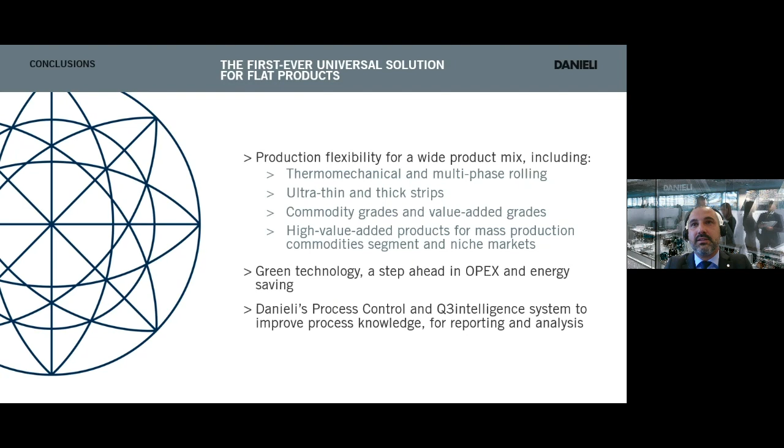Of course, as mentioned at the beginning of this presentation, with an eye on green technology, taking a step ahead into transformation cost and energy saving, with the proper support of an integrated automation system, which allows either inline or offline analysis, in order to further improve process knowledge and process parameters.

So I took the chance to thank the audience for the time, and I hope to have been able to properly transfer some of the main concepts which are the basis of the Danieli Universal Endless technology, which is the utmost technology in order to always get operational flexibility into a running plant. So thanks for all.